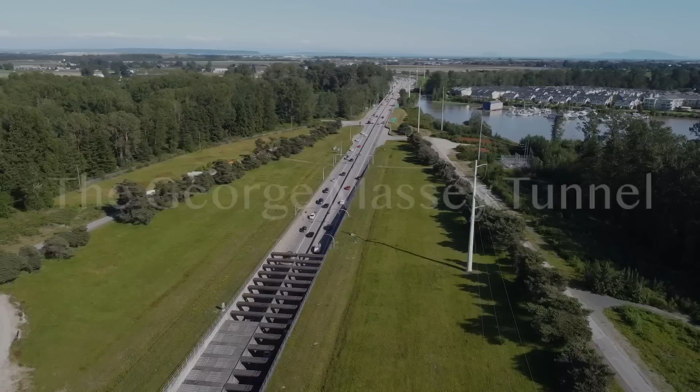Have you gone to Tsawwassen Ferry Terminal, visited White Rock, or flown out of YVR? Do you live in Richmond, Delta, Surrey, or anywhere south of the Fraser? If you answered yes to any of these questions, then chances are you've traveled through the George Massey Tunnel, a historic 4-lane tunnel that opened over 65 years ago, connecting Delta to Richmond via Highway 99.

The George Massey Tunnel has served Metro Vancouver nicely over these past 65 years, but it's at its limit. Every weekday, rush hour slows this crossing to a halt, and people have been demanding change for years. Well, it's time. The region is in the midst of an incredible mega project to replace the George Massey Tunnel, and it's called the Fraser River Tunnel Project.

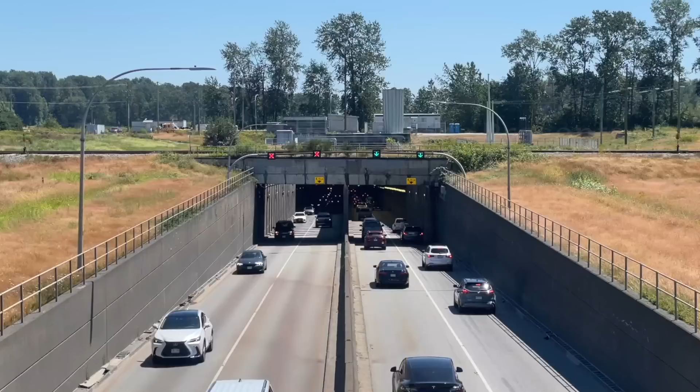Hi, my name is Arden English, and I answered yes to one of those questions in the intro. As someone who grew up south of the Fraser, I've had an abundance of experiences with the George Massey Tunnel. Its old orangey yellow sodium lights hold a special place in my heart as I would hold my breath going from one end to the other. But I remember hearing talks of its replacement since back when I was in elementary school, and after all this time, it's finally almost here.

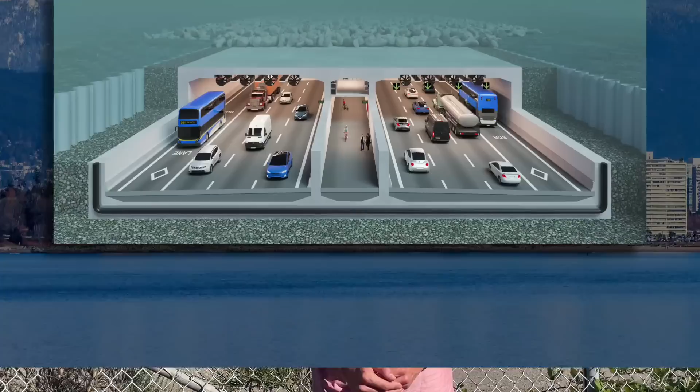The idea is to create a brand new 8-lane tunnel to replace the aging 4-lane tunnel, alongside providing significant improvements to walking, cycling, and public transit, all by the year 2030. But before we get into that, let's take a look at how we got here.

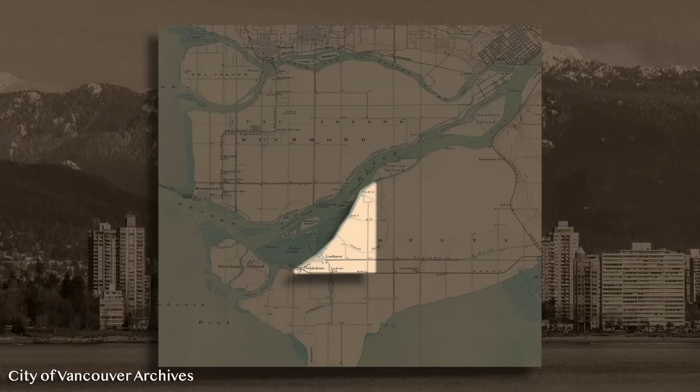Talks about a physical connection between Ladner and Richmond date back to 1927, when the provincial government authorized the Fraser River Bridge Company to build a toll bridge between Ladner and what was then referred to as Lulu Island. This wasn't exactly a popular decision for many. While evidently those living nearby loved the idea, there weren't really too many people there to begin with. As such, the residents of the city of New Westminster fought against the idea, stating that their leg of the Fraser River was a better location for its first physical crossing.

But the Ladner Bridge proposal pushed forward, with the site at Deas Island being chosen as the best location. Despite the apparent progress, New Westminster was still firmly against it, and a change in provincial government was all it took to kill the project. This is a recurring theme in this story. The location of the bridge was changed, and a new plan for a New Westminster Bridge was born.

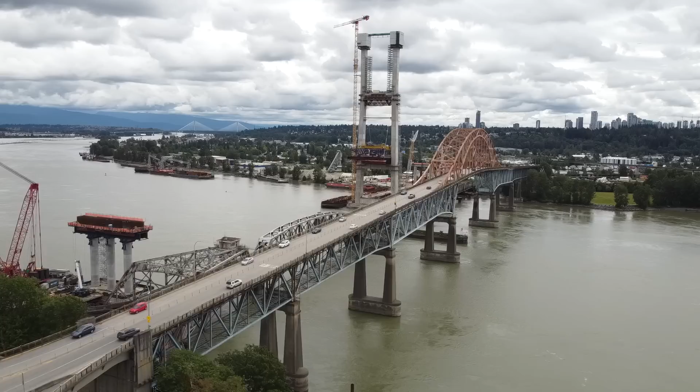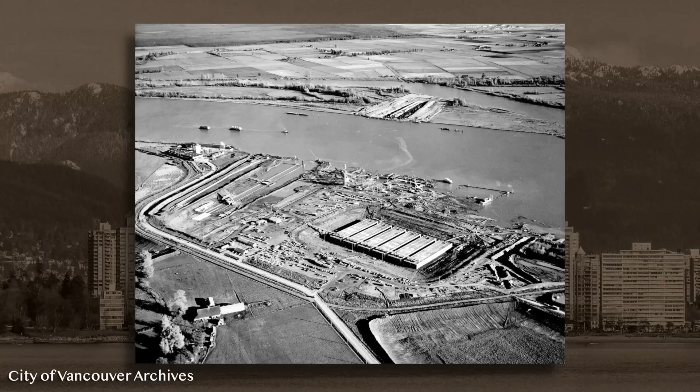That became what we now know as the Pattullo Bridge, which is currently undergoing a replacement project of its own. The Ladner Bridge project was shelved, and the connection continued to be served by a ferry until in 1947, when Ladner resident and local Delta MLA George Massey came forward with a plan for a tunnel instead of a bridge. Skip ahead a few years, and in 1956 the Deas Island Tunnel project was announced at a projected cost of $15 to $17 million.

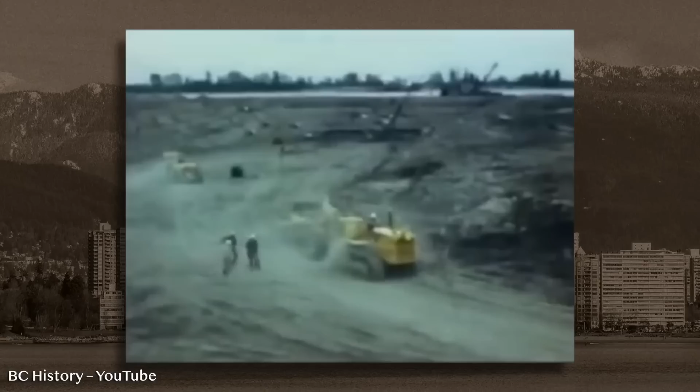Now, that may sound cheap, but I assure you, it hurts even more with an inflation calculator. Construction started the following year, and the way this tunnel was built is nothing short of spectacular. A dry dock was created right next to the construction site where the 6 concrete tunnel segments were created. Upon completion, each segment was floated out and sunk into position. It's worth noting that this dry dock is now the BC Ferries Fleet Maintenance Unit you can see at the northern end of the tunnel.

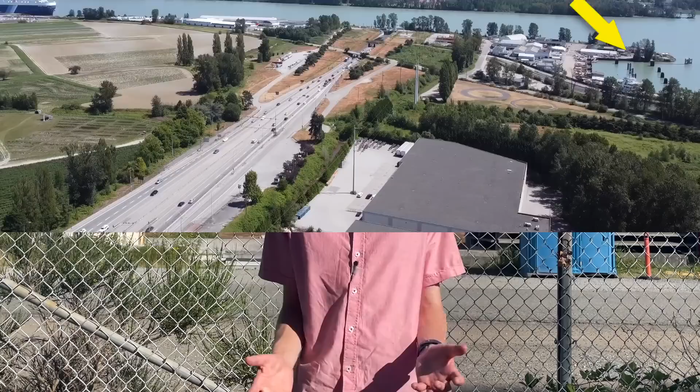And that was it. The tunnel officially opened on May 23, 1959 by Queen Elizabeth II at a final price of $25 million. Originally, the tunnel went by the name of the Dease Island Tunnel, but in 1967 it was renamed after George Massey due to its significance to the project. But the tunnel was ultimately a success. There was finally a second crossing of the Fraser, and the third was soon to come.

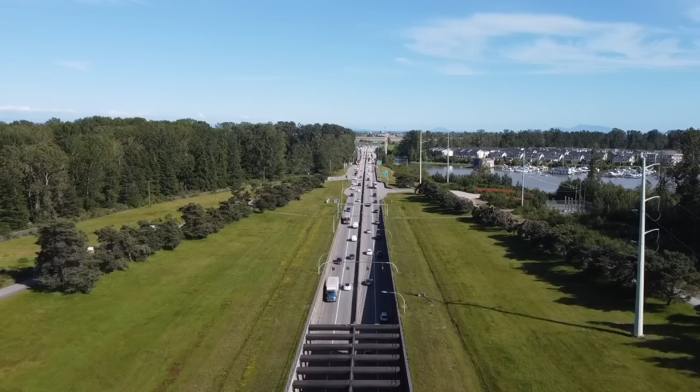Traffic was running smoothly. Until it wasn't. Congestion crept up faster than anticipated, and by the late 70s, the tunnel was already a notorious point of conflict. To mitigate this, a counterflow system was installed in 1981. You can see it in action here. At peak hours, one of the lanes switches directions to better serve the flow of traffic, meaning the tunnel effectively has 3 northbound lanes in the mornings and 3 southbound lanes in the afternoon. It's an unusual system, but it's certainly a unique feature of the George Massey.

Well, that's all fun and good, but why are we replacing this thing? Well, interestingly enough, the original plan wasn't to replace it at all.

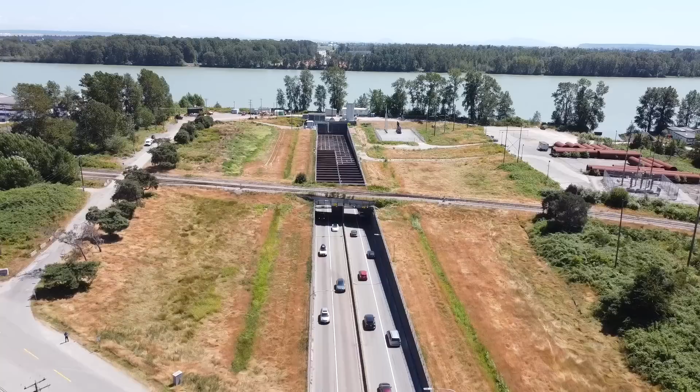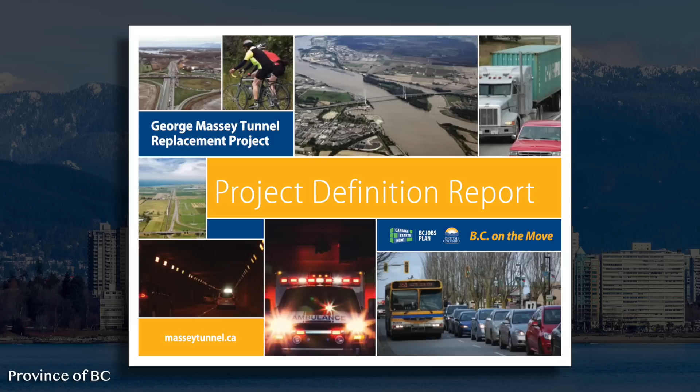Originally, the idea was just to seismically retrofit the existing tunnel, which was easily completed by 2006, but some saw a different opportunity. In 2012, the Ministry of Transportation and Infrastructure began public consultation on a formal replacement of the aging tunnel. And you'll never guess what it was. A bridge! Yeah, bet you didn't see that one coming.

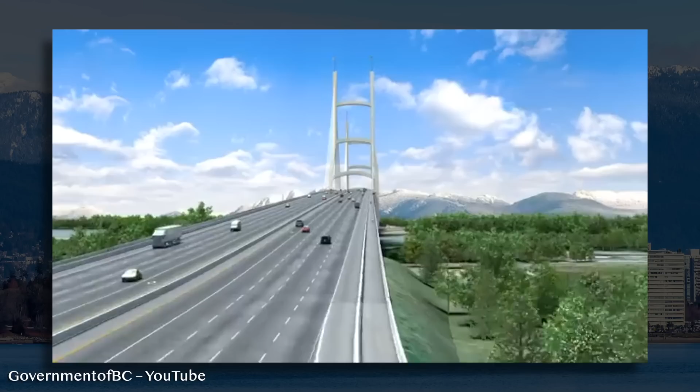At an estimated price of $3.5 billion, this gargantuan 3-kilometer-long, 57-meter-high bridge was the talk of the town. It would be a staggering 10 lanes wide and feature a large multi-use pathway for those who chose to walk or bike over the crossing to avoid paying the toll. Tolls were common practice at the time, with the Port Mann and Golden Ears bridges being tolled as well.

Another similarity to the Port Mann Bridge can be found with its use of HOV lanes for carpool traffic and buses. But this bridge was a massive overhaul, and as the project report says, because it's 10 lanes, it'll surely reduce congestion, right? We'll get back to that later.

You know, the only thing crazier than this bridge being proposed is the fact that it actually started construction. They broke ground on April 5th, 2017, with an estimated completion date of 2022. Even as a kid, I can distinctly remember when they started piling up all this sand along the highway, and also these huge metal pipe things that are still here for some reason. So what gives? Obviously, we're past 2022, and I don't see any bridge here.

So what happened? Politics. It was politics. As soon as this project started construction, it was ultimately scrapped. There's actually a surprising amount of controversy surrounding this bridge that I really don't have the time to get into, but the result of it was a new BC Premier being elected, that being NDP's John Horgan, who sent it all back to the drawing board. Like I said, recurring theme in this topic.

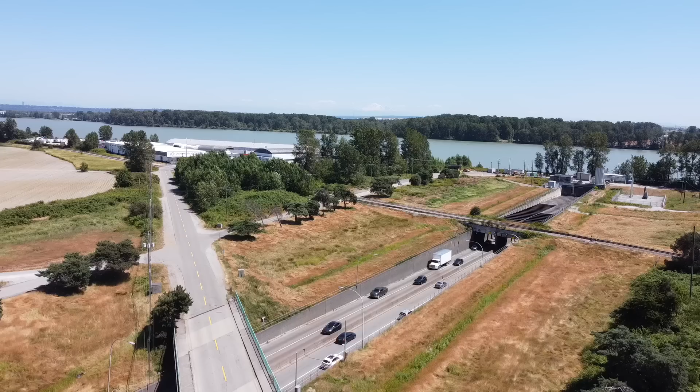And that finally brings us to today, with a brand new project that's actually well underway. The Fraser River Tunnel Project is the hot new attempt to finally get rid of the George Massey, and an 8-lane tunnel is the plan to get it done.

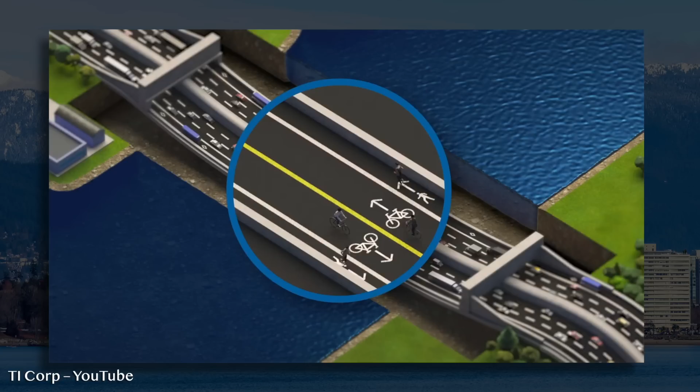But this isn't just an increase in lanes, no, this is an upgrade for every mode of transportation over this crossing. 2 of the 8 lanes of the tunnel will be bus-only lanes, so there's really only 6 lanes for regular vehicle traffic. This means that rush hour will still have the same amount of travel lanes in each desired direction, although driving the opposite direction will not be nearly as miserable.

Another huge benefit of the project is the inclusion of a large multi-use path for those who choose to walk or bike through the tunnel. As it is right now, there's actually no option for people looking to walk or cycle through the George Massey directly. There is a free bicycle shuttle that comes every 30 minutes to take you from one end to the other, but it only runs at peak hours and it only has a capacity for 8 bikes.

It is really hard to understate just how spectacular this new tunnel will be, simply from an engineering standpoint. Now, that's not my area of expertise, but you know whose it is? Meet Donald Trapp, the project director of the Fraser River Tunnel Project. He's had experience as a project director in the past, but he's also a civil engineer.

When I attended one of the open houses hosted for the Fraser River Tunnel Project, I got the opportunity to sit down with Donald Trapp and talk to him about the project. And the first thing that impressed me was the way this tunnel is going to be built.

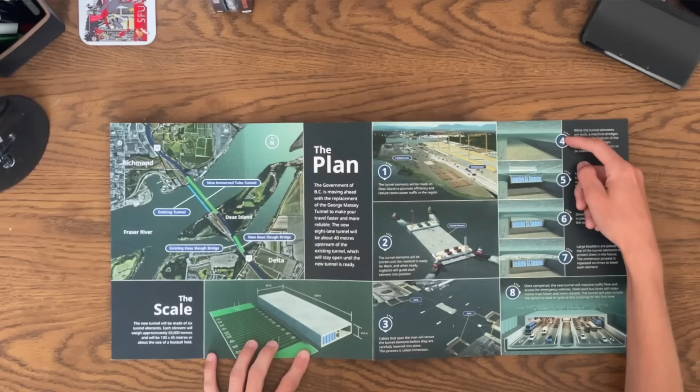Think of large concrete tunnel elements, kind of boxes, sealed at the end. They float, which is incredible. Our elements will be 60,000 tons, dredge the river, and then carefully controlled, position these elements using tugs, winches, and anchors, and sinking individual tunnel elements to 25 millimeter accuracy 6 times, creating your tunnel. Now, you may once again be sensing some deja vu in this video because, well, that's exactly how the original Massey Tunnel was built.

It's a classic case of if it ain't broke, don't fix it, but advancements in technology over time will ultimately make the process much less stressful. One major concern for people who hear about this project for the first time is how the construction will affect their daily commute through the tunnel, and well, there's some good news on that front.

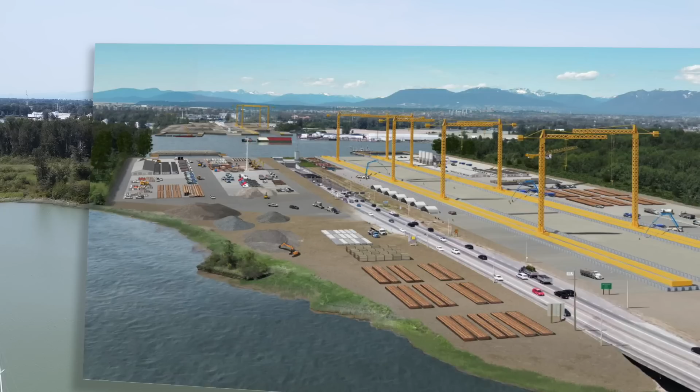We know the importance of maintaining mobility of transportation. The existing tunnel will stay operational. The new tunnel is approximately 40 meters upstream, essentially off alignment, so you'll basically maintain current traffic through the existing tunnel while the new tunnel is being constructed. This is exactly what was done when the Port Mann Bridge was replaced, and can currently be seen with the Pattullo Bridge replacement as well.

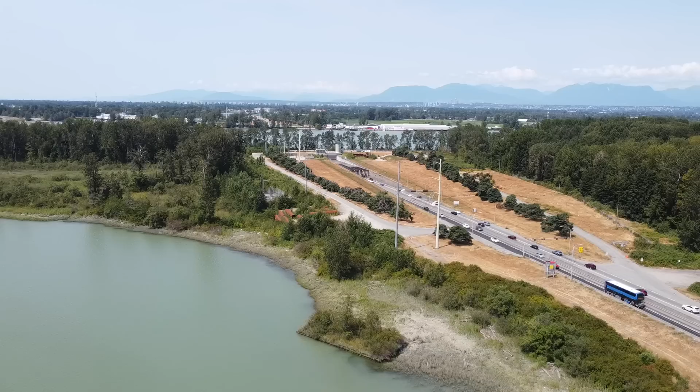As all of this goes on, traffic will flow as usual with the construction just out of the way. And we don't have to wait too long to see this unfold. If all goes according to plan, construction should be starting in 2026, with the tunnel ultimately being completed by 2030. After that point, the decommissioning process for the Massey Tunnel will begin.

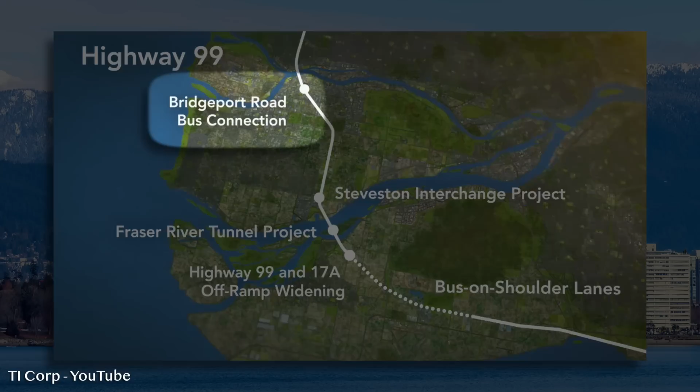This is a good time to mention that the Fraser River Tunnel Project is just one piece of a greater project called the Highway 99 Tunnel Program. While this here is all that's going on with the Fraser River Tunnel Project, this is the entire scope of the Highway 99 Tunnel Program. Let's start from the north, shall we? It all started with the Bridgeport Road bus connection.

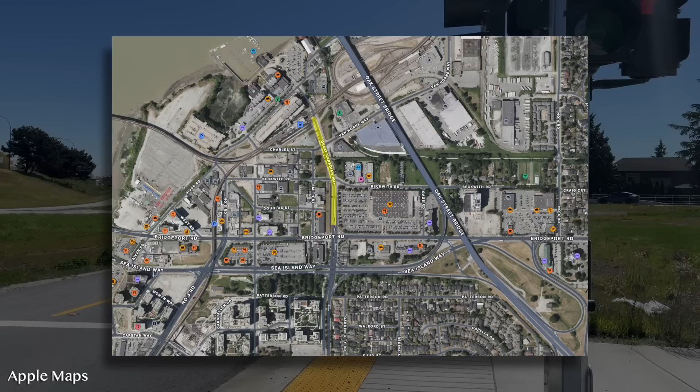The star of this upgrade is the brand new transit-only accessway onto Highway 99 headed southbound. Previously, buses headed southbound had to deal with this truly awful set of intersections at Great Canadian Way, Bridgeport Road, and Sea Island Way just to get back onto the highway. Now they only have to deal with one of these awful intersections, luckily the better of the two.

Buses now get to turn back onto Bridgeport Road where they access this new connection point. It's a completely seamless connection that can speed up travel times immensely during rush hour, and while a bit more bus priority along Bridgeport Road would make this completely flawless, it's hard to complain when this new intersection is a nearly instantaneous green light for buses.

There were also these brand new pedestrian and cycling routes added here as well, which help get to the multi-use pathway to Bridgeport Station just around the block.

Moving south, we get to the Steveston Interchange Project, a brand new 5-lane overpass at the eastern end of Steveston Highway to replace the old 2-lane one.

For buses headed northbound to Bridgeport, there will be a new in-lane bus stop, similar to the one found along the R6 Rapid Bus at 72nd and Scott Road in Surrey. Currently, buses have to weave in and out between all the cars getting off here, changing lanes erratically. This aims to streamline that process.

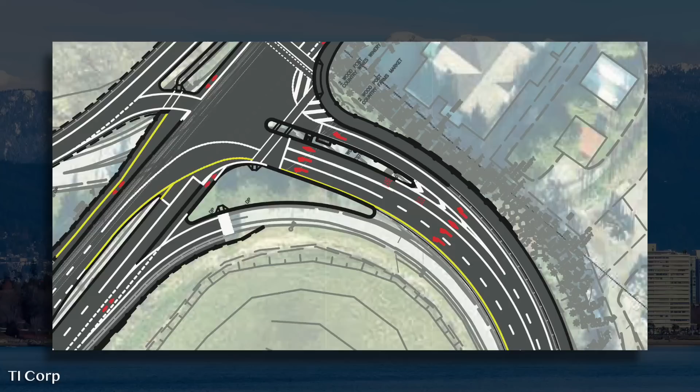Good quality sidewalks and fully separated bike lanes will also be built along either side of the new interchange. This is a huge upgrade from the whole lot of not that exists there right now.

Oh, hold on, let me just, here we go, and perfect.

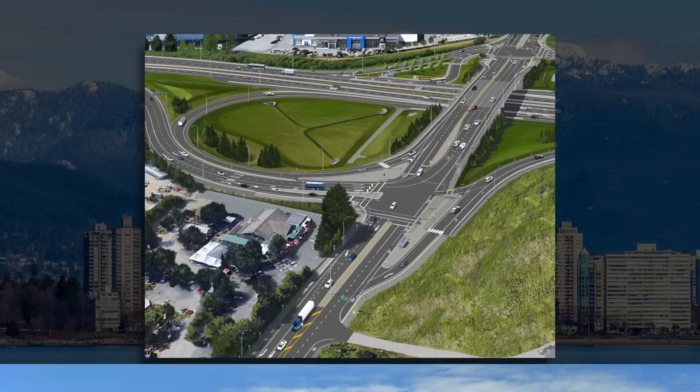Although for some reason, it looks like these great pedestrian measures will have to deal with some really bad slip lanes, but I'll get back to that.

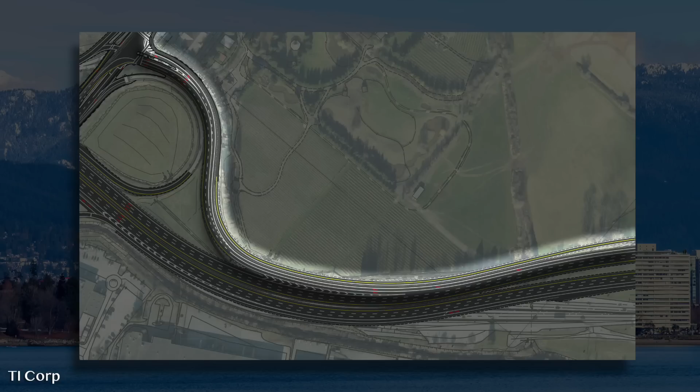The new Steveston Interchange is also the start of the new pedestrian and cycling connection in and around the Fraser River Tunnel. As for how you actually get in the tunnel, I'll let the project director explain.

So the access that we have to the center of the tunnel, essentially it's a switchback. So you come out of the tunnel, and then there'll be a switchback within the road, and then you have a T on top, so you'll be able to access both sides of the highway into the center of the tunnel, tying into existing transportation networks in both Steveston and the Delta side, including Dease Island Park.

That T element he mentions has two very different uses at either end of the tunnel. At the Richmond side, one way will take you towards Steveston Interchange and the other towards a newly rerouted Rice Mill Road. On the Delta side, however, the T is located farther along after you get out of the median of the highway.

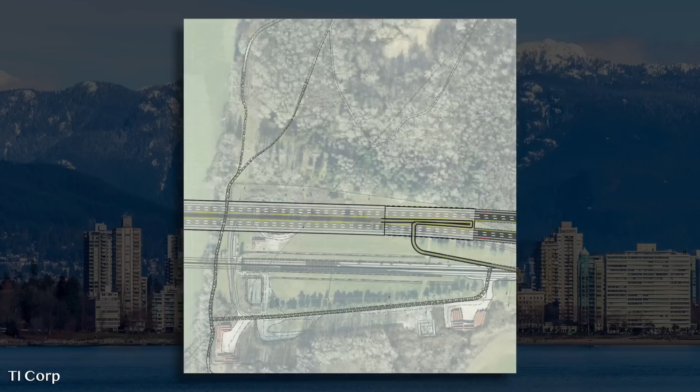If you turn right, you'll have immediate access to the many trails of Dease Island, which I might add is a beautiful park. If you continue headed straight along the T, you'll actually start to ride along the old Highway 99 right-of-way, including the old bridge over the Dease Slough.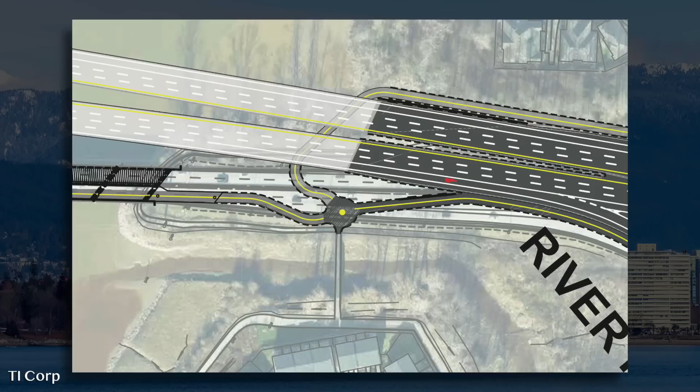At the other end, you'll reach this little pedestrian roundabout for some reason, where the path splits, headed under the overpass to the north to connect to the Millennium Trail and also onwards south towards Ladner.

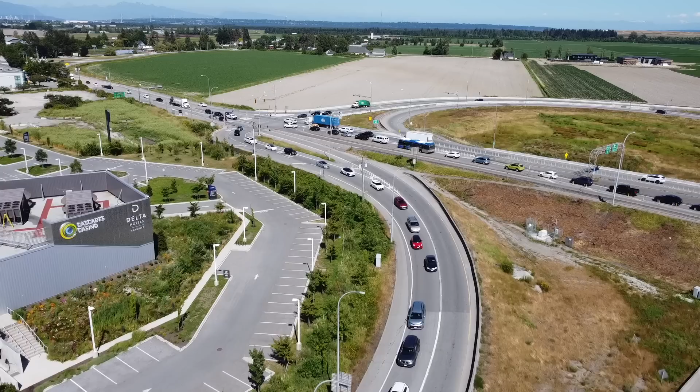Continuing farther south, we reach the upgrades to the Highway 17A off-ramp. Now recently, you may have seen a lot of work going on here, but don't be fooled. That was just repairs being done after a semi-truck decided to run into it. Happened farther along the way as well.

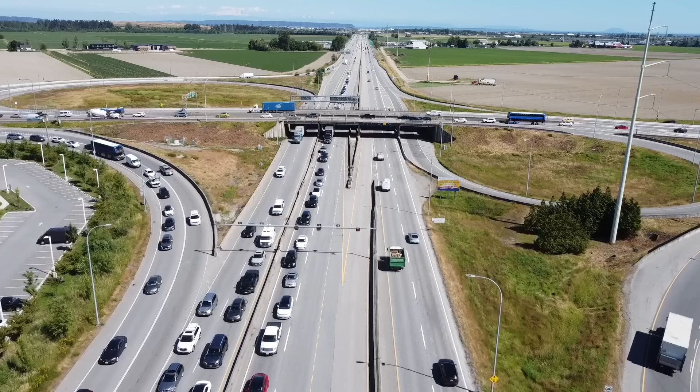And by the looks of it, these truckers seem just as eager to get this tunnel replaced as us. This is another area where transit priority is being added, with a sort of queue jump to give buses a head start into the tunnel. Although you'd think it'd be faster to just run the buses regularly on the highway instead of this weird diversion. There's no bus stop here like you have over at Steveston Interchange, so I'm not really sure why the buses have to detour.

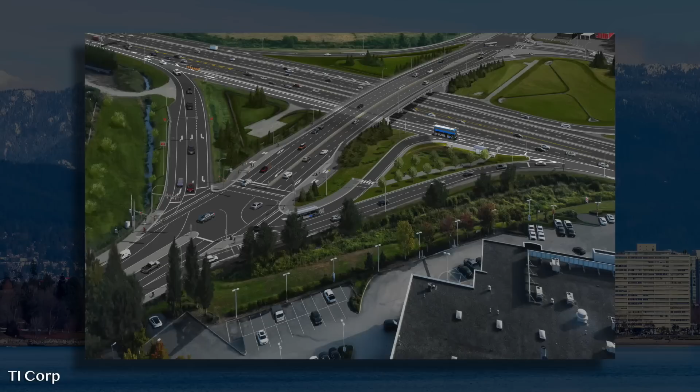They honestly could just stay on this separated part of highway right over here. As of right now, this acts as a bus queue jump that is especially useful in rush hour, but once the new tunnel is implemented with bus lanes all the way through, there won't be any need for a queue jump anymore. Apparently there are plans to implement a stop here in the future, which would partially explain why this diversion is here, but even still, a bus stop like you see over at Steveston Interchange headed southbound would save buses much more time than needing to pull off all this way.

But speaking of bus lanes, let's check out the last piece of the program. Between Highway 17A and Ladner Trunk Road at Matthews Exchange, brand new bus-on-shoulder lanes have been introduced. These are a game changer. Nothing makes a bus more appealing than seeing it fly past you at the peak of rush hour, and this does exactly that. It's no surprise this goes hand in hand with the bus lanes in the new tunnel.

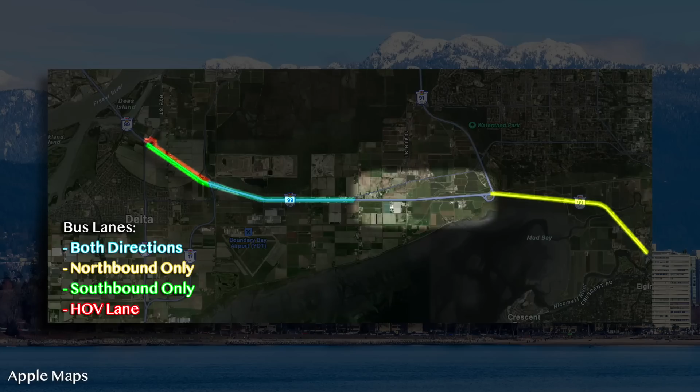Now, nearly all of Delta will have full bus priority, and I can only hope the rest of this stretch of Highway 99 can get bus lanes here as well. It currently has them for most of the northbound stretch except for this little gap here, but weirdly enough, the southbound side is missing them completely. The brand new bus lanes in Delta alone can save transit riders up to 10 minutes on their trip. Imagine how much time could be saved if they had them the whole way.

There isn't really much to add besides that. Richmond has them almost the whole way except for this little stretch going south where there's an HOV lane for some reason, and the same is seen in Delta leading up to the 17A interchange. Those should both be easy things to fix.

Well, that's the full scope of the program. All in all, it's a lot of necessary additions to a vital transportation corridor for Metro Vancouver, and a lot of work has been done to bring it all to reality. The Bridgeport Road bus connection, Highway 17A off-ramp, and Highway 99 bus-on-shoulder lanes in Delta have all been completed already, and the new Steveston Highway interchange is well under construction with an estimated completion date of 2025. After that, all that will remain is the tunnel itself.

Well, all of this is fine and wonderful, but this is no perfect project. Every project will have its shortcomings, and there are a few here that I would like to highlight. Let's bring it back to the new Steveston interchange. I mentioned earlier that the new additions for active transportation are a great thing to see here and certainly cannot go unmentioned, but there's one major thing holding them back from greatness.

These slip lanes. Bit of context: this is a slip lane. It's a right turn lane that often features a yield sign for any vehicles turning right. This creates a pedestrian island in between the right turn lane and general traffic. In this case, it serves as the access point for the highway on-ramp.

The goal of slip lanes is to allow cars to turn right without needing to slow down too much. Now, let's think for a second why this might not be a great idea when dealing with a dedicated pedestrian and cycleway. Slip lanes are notoriously dangerous. The main thing drivers are thinking when entering one is to look for oncoming cars in the direction they are hoping to turn.

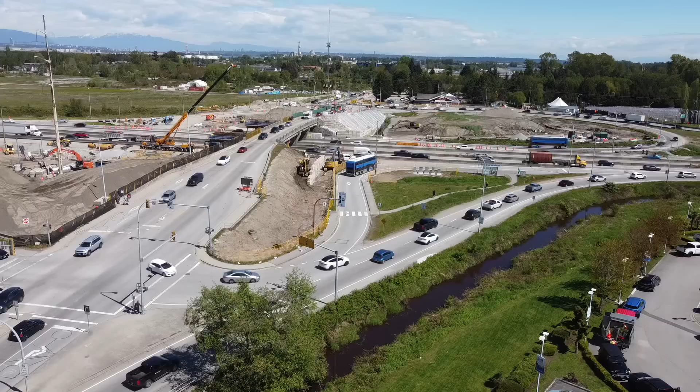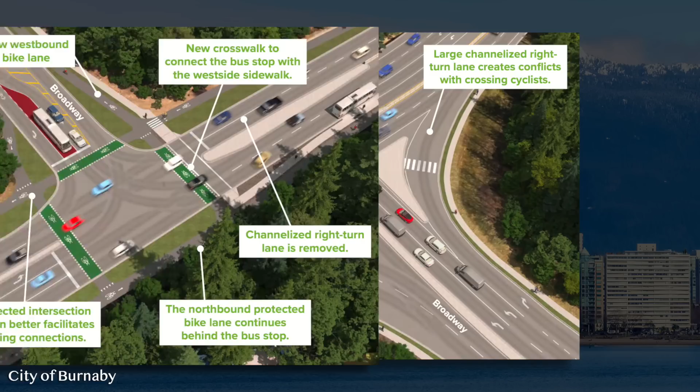The majority of new road projects around Metro Vancouver have been aiming to eliminate this style of street design whenever possible. Take the Burnaby SFU cycling connection, for example, with several instances of slip lanes being replaced with safe measures for pedestrians, often by changing the turning radius for vehicles so that they need to turn slower. Banning right turns on red lights is a final step that can make these intersections as safe as possible, though that's a whole other issue that I won't get into here.

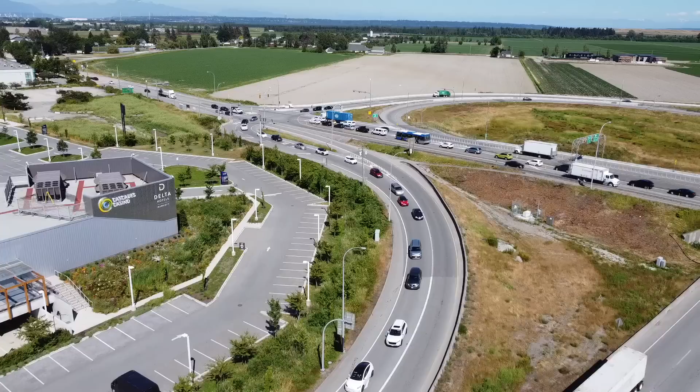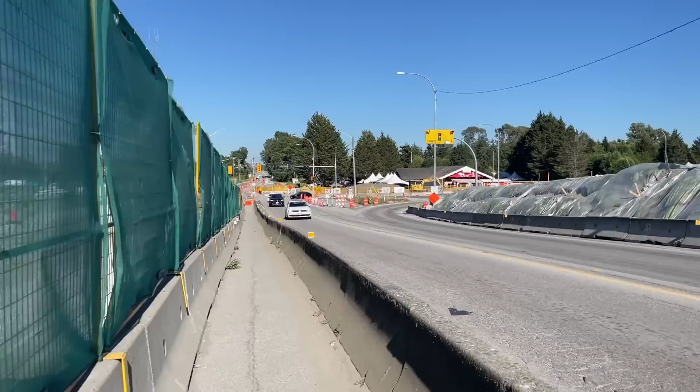Now I'm highlighting the Steveston interchange for this issue, but it's also seen in the Highway 17A interchange upgrades too. This safe pathway for cyclists doesn't seem all too safe. Little missteps like these really hold back what would otherwise be a perfect pedestrian and cycling experience. And while yes, it is a huge step up from what is here now, it is still a massive shame that this is a part of the final plan.

Now, let's head back to the tunnel. The new tunnel certainly has a lot going for it, but I've really gotta know, what was the thought process behind putting the pedestrian and cycleway in the middle of a highway?

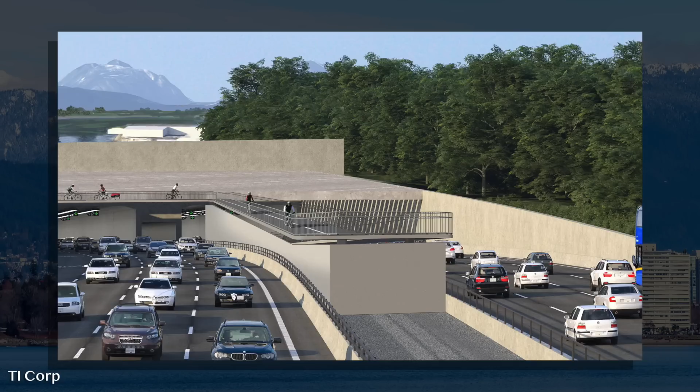The goal of a AAA cycling network is for it to be accessible for everyone. And while a dedicated, separated, paved multi-use pathway certainly appears to check all of those boxes, there's a less apparent hurdle that comes alongside general comfortability riding in certain areas. Many casual cyclists, as well as just pedestrians, tend to avoid putting themselves in uncomfortable situations.

The first example I can think of is the noise factor. Cars are loud, trucks are loud, and yes, buses are also loud. So it's undeniable that there will be a lot of noise when entering and exiting the tunnel alongside vehicles going 80 kilometers an hour and above.

Take it from the guy who's been filming right next to the highway for an hour and a half now. It isn't exactly a blast. And when I don't have a noise isolating microphone on, it sounds like this. I don't even know if you can hear me at this point. I could just be talking to nobody.

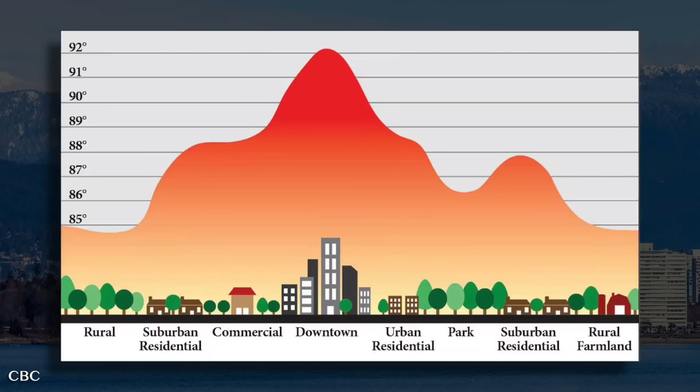Another aspect to consider is heat. Roadways get hot, especially on sunny summer days, and asphalt absorbs a lot of heat. At the same time, those vehicle emissions also contribute to the heat of the air. And if you're in the middle of a freeway experiencing the peak of the heat island effect, well, it isn't just unpleasant, it can be downright dangerous.

And I'm not saying to install shade canopies all along here or something. Simply moving the pathway closer to the existing trees will give the opportunity for natural shade. Who knows, maybe we can even plant some more trees along the path as well.

Final point: air quality. Look, we can talk about how the shift to electric vehicles has been making this slightly less of an issue, but there are still combustion engine vehicles on the highway. It's just the way it is.

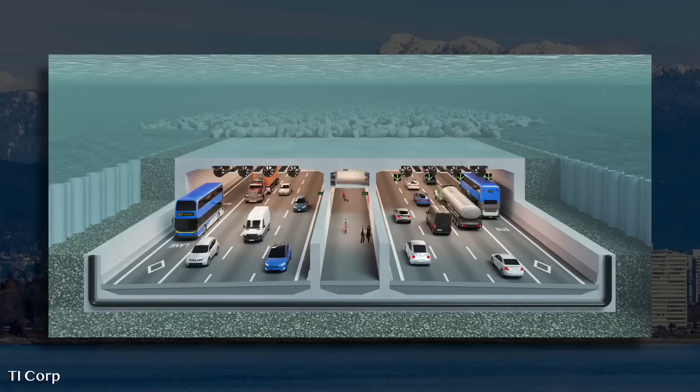And because of this fact, if you're walking or riding in the middle of 8 lanes of high-speed traffic, you are going to be directly exposed to all of the emissions around you. This wouldn't be nearly as big of an issue if the pathway was located on the side of the tunnel instead of right in the middle.

In this case, you also wouldn't need to take the time to cross over the tunnel, perform the switchback to get in, and then do the opposite when you get out on the other side. You could just enter and exit like everybody else using the tunnel.

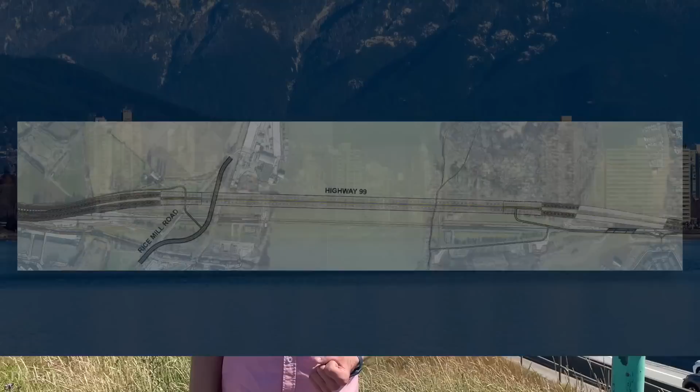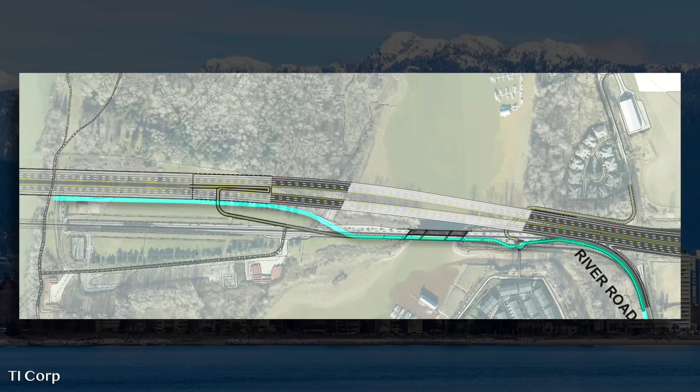Let's say we move the multi-use pathway to the west side of the tunnel. For starters, nothing would change along River Road. The connection to the Deas Island trails might need to be moved to keep the grade the same, not being too steep, but you would have much more room to work with getting in and out of the tunnel without needing to turn around halfway.

And on the Richmond side, it's even better. By moving the pathway to the west side, you avoid needing to build this overpass at all. This way you can exit directly to the west side of Steveston Interchange, where 99% of the people using it are coming from. Oh, and you can also keep an easy connection to Rice Mill Road.

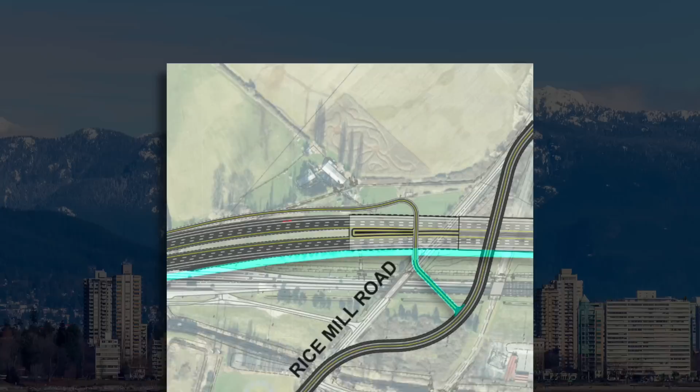If these changes were incorporated, the experience for users of active transportation would be significantly improved. You wouldn't have to go through the entirety of Steveston Interchange just to get in and out of the tunnel, thus avoiding using those nasty slip lanes, which would make it not only a much safer experience, but a faster one as well. And this isn't some far-fetched idea either.

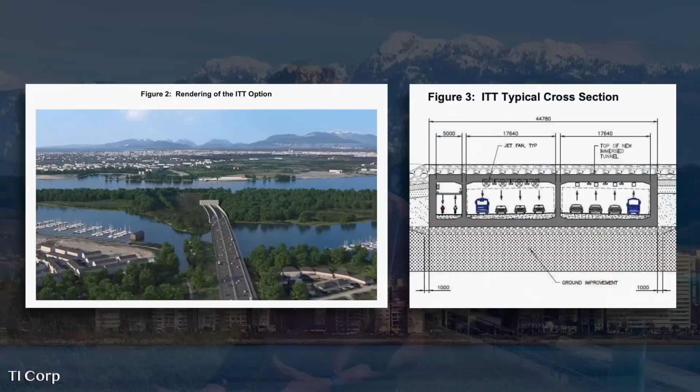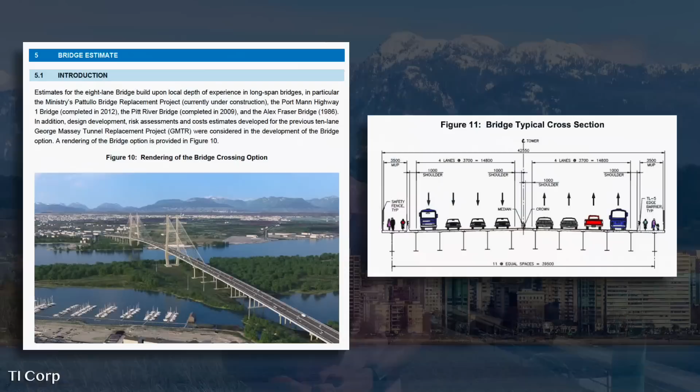This was actually originally the plan. Granted, it was on the east side, but both the tunnel and the bridge would have allocated space for this pathway, and the revised bridge would have had one at either side. I have no idea if this is still able to be changed or if the design is final, but if the team ends up seeing this, I hope this is at least taken into consideration.

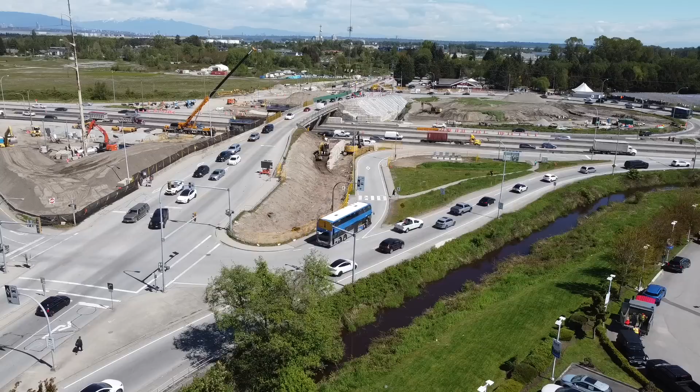Now I'd like to quickly tackle a much broader question. Should we even be doing this? I've spent most of this video pretty much saying that the best parts of this project is everything it does for folks not using cars, so is it worth spending all this money for this massive project if there's ultimately no benefit for its primary user? Well, it's complicated. While yes, every other mode of transportation is getting a massive benefit from this project, that isn't to say there's no benefit for cars either.

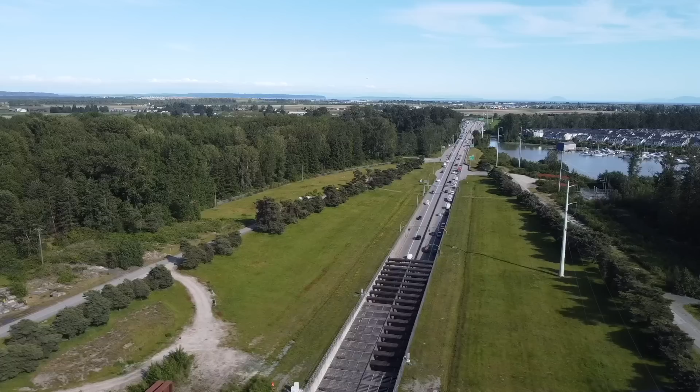When traveling through the tunnel at rush hour, you will have 3 travel lanes. This will stay the same for the new tunnel. But if you're trying to go in the opposite direction of counterflow, well, now you only have 1 lane. This winds up creating a disgusting bottleneck for no matter which direction you are traveling to. If you're traveling southbound against rush hour, you're going from 3 lanes down to 1. And if you're traveling northbound, that's 5 lanes down to 1 lane.

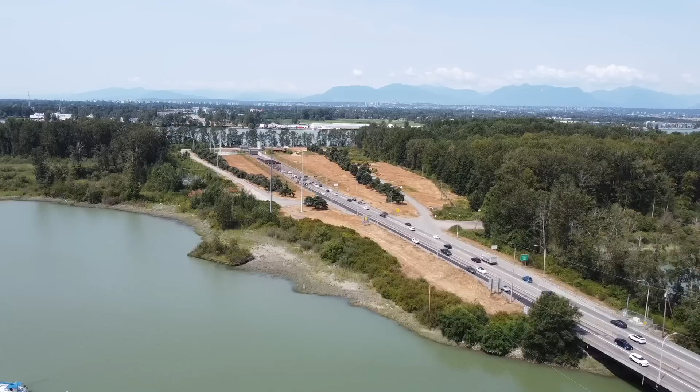This should not be as big of an issue when the new tunnel opens, with both directions having an equal number of lanes. But this is a big issue for some people, saying that it's irresponsible to spend so much money on a project that isn't future-proofed with additional travel lanes. Their solution being that the tunnel should be wider, or at least have the bus lane be an HOV lane.

And I'll be honest, I used to think the same way. When I first saw the bus lanes going in along Highway 99, I thought it was a huge missed opportunity that they weren't HOV lanes, something that I could use if I needed to. But since then, I've learned how roads can be designed to move greater amounts of people, and transit, when compared to typical vehicle traffic, is remarkably more efficient.

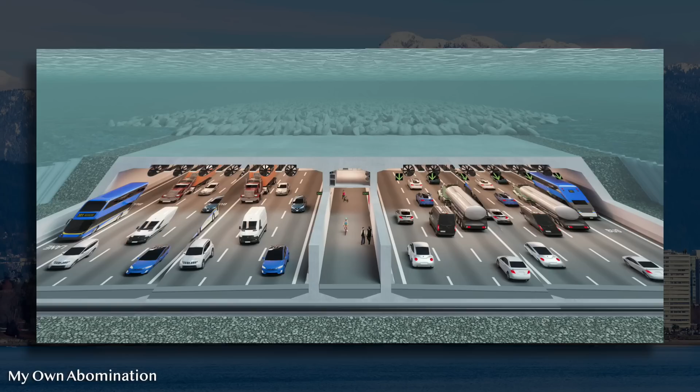When it comes to actually moving people, and not just cars, you'll find that a single car lane with frequent buses can carry between 1,000 and 2,800 people per hour. But a single dedicated rapid transit lane can carry double, even triple the amount of people in some cases. This means that having that additional bus lane go through the tunnel is the equivalent of having a total of 5 or 6 car lanes in each direction, all without needing to balloon the cost of this project out of control. And that's without even mentioning the pathway in the middle.

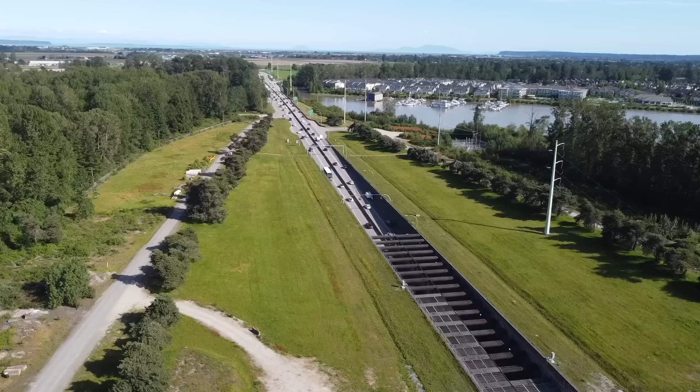So it isn't some world-ending decision to maintain the same number of peak direction car lanes through this tunnel, because the travel capacity will still be greatly improved. And this is a bit of a common trend we're seeing with our crossing replacements. The Pattullo Bridge replacement is also only opening with 4 lanes, the same number as the original bridge. Granted, it is being built with the ability to be expanded into 6 lanes, but that might not be necessary for a while given the state of SkyTrain and other transit projects in the area.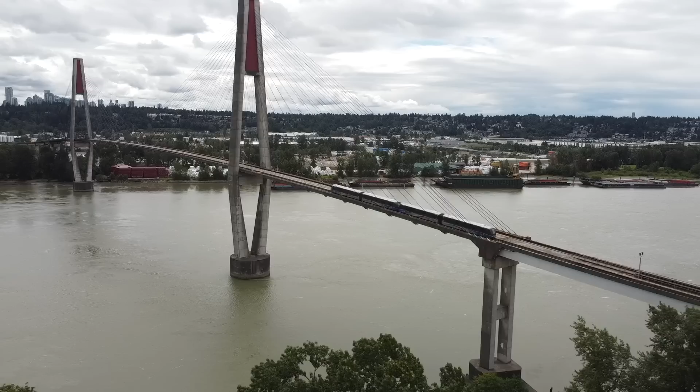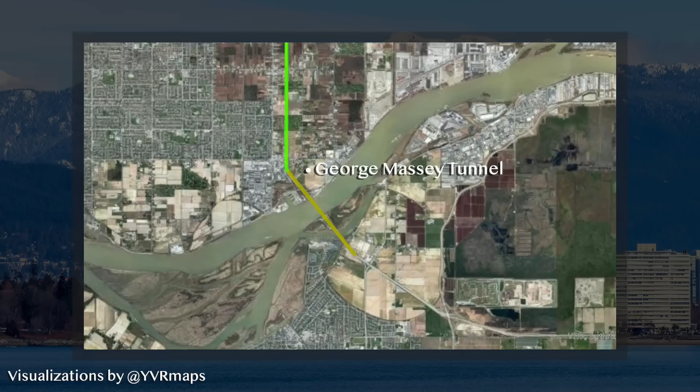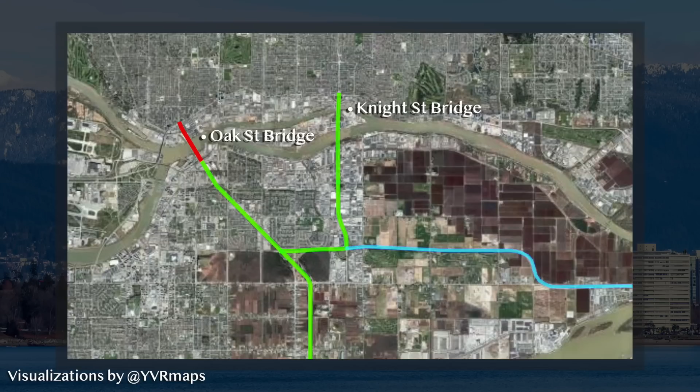However, this brings us to another trend in highway expansion projects: moving the bottleneck. Picture this. You eliminate the current bottleneck at the George Massey Tunnel by widening it from 4 lanes to 8. You now have a consistent number of lanes moving throughout Richmond. But wait, the Oak Street Bridge is still only 4 lanes. Oh, but some people may have turned off to head to the Knight Street Bridge. But now you're adding the recently expanded capacity of the 7-lane Alex Fraser Bridge into the picture, and yeah, we've got a problem.

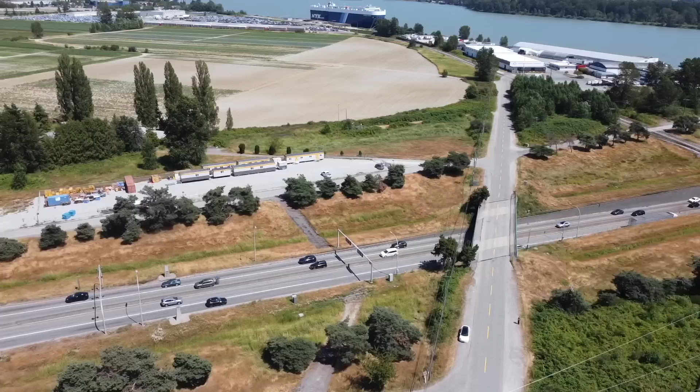With traffic still likely to increase along this crossing, we still have the potential to run into a disastrous situation. It may seem like we're eliminating the bottleneck at the George Massey Tunnel, but in reality, the likely outcome is that the bottleneck will simply move, in this case to the Oak Street and Knight Street bridges.

And we've seen this before in our region. A critique politicians had of the replacement for the Port Mann Bridge that would fix traffic congestion was that it will just move the bottleneck into Burnaby, and that's exactly what happened. Highway widening projects have the persistent issue of induced demand, the idea that more people will see this upgraded crossing as a better commuting decision, quickly reintroducing the familiar congestion in the first place.

At any time of day now, people will have 3 travel lanes to go north or south through this crossing instead of 2, so it's fair to assume that more people will be attracted to the Massey crossing regularly throughout the day. The question is, where are these people going?

If they're going to other crossings, then are we going to have to spend billions widening all of those as well? That isn't sustainable. The likely assumption here is that the increased volumes of traffic will be turning off into Richmond, not continuing all the way through to other crossings. And while that may be true, that's not a good thing either.

Okay, I feel like I've been complaining for too long. Let's end this off on a better note.

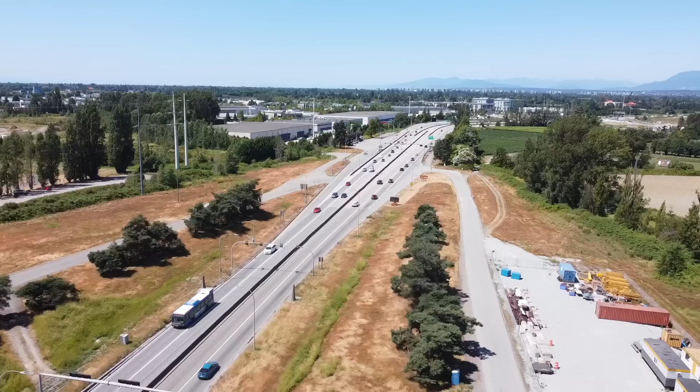All of that brings us to where we are now, building high-quality, reliable infrastructure for those other modes of transportation, the more efficient ones that I spoke of before. Richmond has a long way to go in this battle, but the signs of change are there, and it's our job to keep pushing for them and hold their council accountable when this may be overlooked.

Delta has a big fight ahead as well, but an easy place to start is with a dedicated cycleway from Tsawwassen Ferry Terminal to the new tunnel, connecting the River Road path to Arthur Road and all the way to the Ferry Terminal Causeway. To some Delta residents, this may just seem like a path in the middle of nowhere, but this is a route that is taken far more often than you may expect.

In fact, it's so popular that there's a seasonal dedicated bike bus from Bridgeport Station to the ferry terminal. If you've got to start somewhere, why not there?

Ultimately, while the Fraser River Tunnel Project has its flaws, I still believe it is a project that should happen. In my eyes, the overall benefits outweigh the costs, and that isn't to say all the problems are permanent either. But this is bigger than just a tunnel.

It's 2 overpasses, a transitway, and several kilometers of bus lanes, of course, but it's also a test of the infrastructure in these 2 cities. We know we have issues with traffic, and we know we have an increasing population, so we're going to have to be careful not to gridlock ourselves as our region continues growing.

It's not about expanding lanes. It's about creating a shift in the modal share, the method in which people choose to get around. We've got a long ways to go, but this is a notorious point of conflict in our network, which means it's a good place to start.

I can personally say I do a little bit of everything. I walk, bike, drive, and take transit, usually just to get to wherever I need to be in the fastest way possible. And this isn't a unique way of thinking. So when we design our future projects, let's make sure that everyone gets to where they need to be quickly, no matter the way they choose to do it.

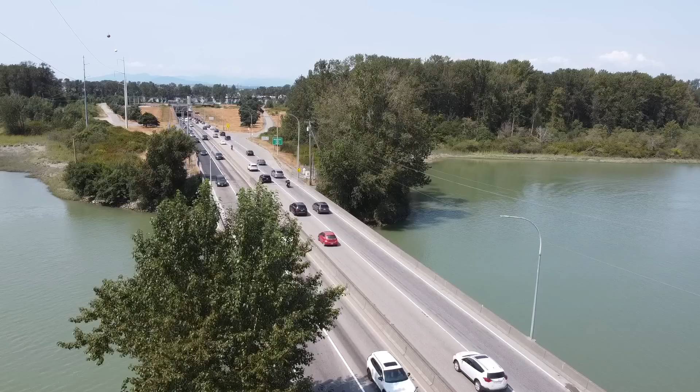Because regardless of the way you get around, it should not be a stretch to say that every method of transportation should be efficient, accessible, and reliable at a similar level. That is what I believe is the true benefit of the Fraser River Tunnel Project. Thank you.

I wonder what the new tunnel will be called when it ends up opening. The Deas Island Tunnel? The George Massey 2? The Greater Discussions Tunnel? Ooh, that has a good ring to it.